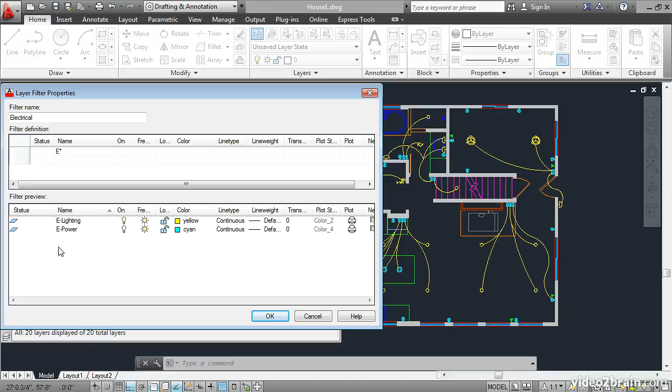Let's call this filter Electrical. Click in the name area here and type capital letter E. This filters the layer list to display only the layers belonging to the electrical discipline. Click OK, and the filter shows you the list. Click on All to see all of the layers again.

Let's create a different type of filter. Right here, you can create a new group filter. Click the button and then press Enter. We will just accept the default name Group Filter 1, and right now there's nothing in it. Click on All, and then let's drag specific layers into the Group Filter 1.

Drag in A doors, A poche. Poche refers to the shading inside the walls. And then scroll down and drag in the electrical layers and the D communication layer. Then click on the group filter. So it receives only the layers that you drag into it.

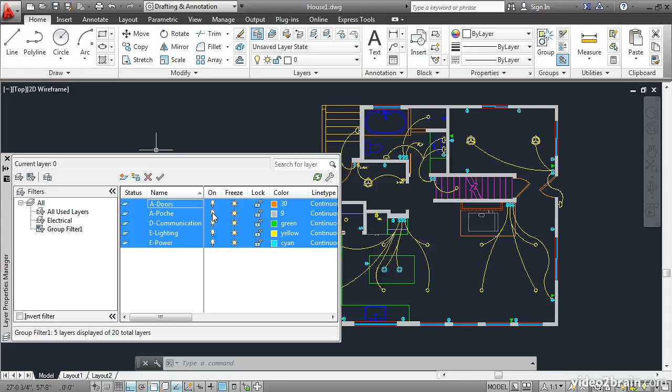I'll select all of these layers by clicking on the first one, holding down the Shift key, and clicking on the last one. Then I'll turn them off by clicking any one of the layer's light bulb icons. Click on All to display all of the layers. You can also sort the layer list by clicking on these headers. I'll click once and then again to sort the list in opposite order, and you can see all the layers that are off are now at the top of the list.

Every drawing has a layer 0. This is created by default. Drawings can also have another system layer called Defpoints, and this is generated when you add a dimension object. I'll scroll back up and notice that this one layer has a green checkbox next to it. That indicates the current layer, and you can only have one current layer at any given time. I'll double-click on A header right here to set it current. It also says that right up here, current layer A header.

I'll go ahead and draw a line over here in this door opening, and it will be on the A header layer. It's white right now because layer A header is white. I'll click on the color swatch to open the color picker, and I'll select a color. I'll choose a green up here. Colors have swatches, and they also have numbers here.

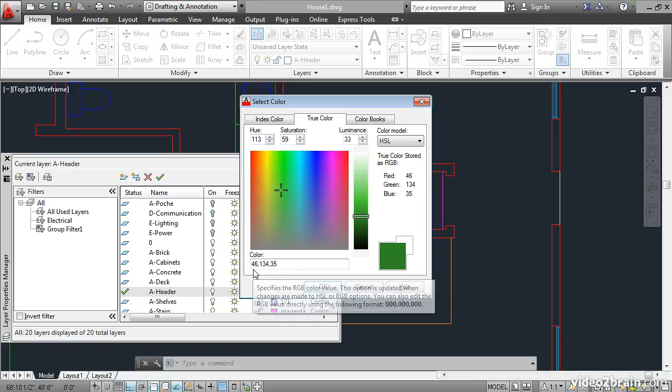This is color 94. In AutoCAD, color is used merely to differentiate objects on screen. It has a different role than in a program such as Photoshop, where you're representing continuous tone. However, you can select true color if you wish from this color ramp. You can drag the crosshair around to select a specific hue and saturation level, and you can also drag this slider to set the amount of luminance. If you do this, your color will have 3 numbers representing the red, green, and blue components.

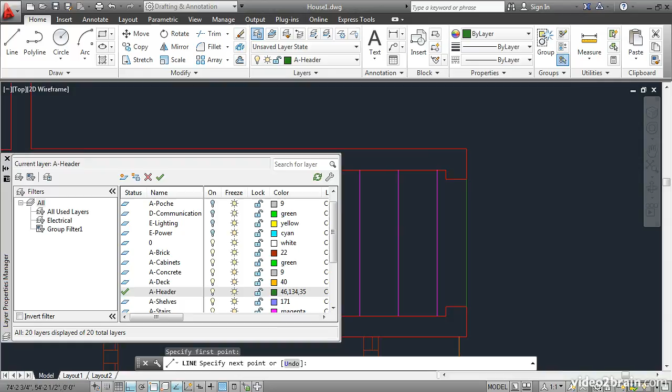I'll click OK. And you see here, I can expand this by dragging it, and you can see the color number listed here. This is a true color, and these other numbers that are just single numbers, those are AutoCAD Color Index colors. I'll just go ahead and draw in the other header lines with the Line tool. I'll press Enter, Enter to end and restart the line command each time I need it. And then over here we have some other headers that we need. Again, headers are the part of the wall above a door or opening.

Now watch what happens if I turn off this layer. I'll get a warning. It says the current layer will be turned off. What do you want to do? If we turn off the current layer, then we have a potentially dangerous situation, because I could draw another line here, but it would be invisible because it's on a layer that's off. So you should avoid this practice.

Instead, I'll turn that layer back on, set a different layer current. I'll double-click on layer 0, for example, and then I could toggle off A-Header. If I were to draw an object, such as a line, I would see it because it would be on layer 0. I'll just turn A-Header back on and then erase these stray lines.

Layers can also be frozen. If I freeze a layer, it likewise hides it on the screen. The main difference between turning a layer off and freezing it has to do with regeneration. I'll just zoom out a bit and demonstrate that for you. I'll make A-Header current, draw a line that extends up above the plan, some arbitrary distance. And then I'll zoom extents.

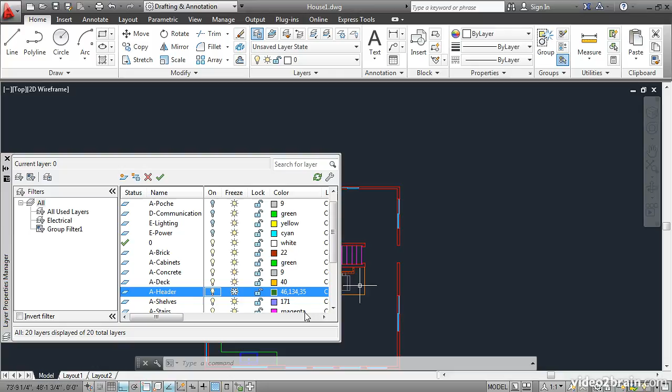However, if I freeze the layer and turn it on, it's still invisible. But then if I do a zoom extents, AutoCAD is no longer considering that object. So that's really the main difference between turning something off and freezing it. I'll go ahead and thaw the layer and then erase this line.

You can also lock and unlock layers using these padlock icons. If I lock A-Header, notice that the color dimmed slightly. If I put the cursor over A-Header, you'll see an icon appear that's a little padlock. This means it's locked and I can't do anything to it. If I try to erase it, say, and click on it, it will just say one was on a locked layer and it won't let me select.

This isn't really a security feature because I can come back here and unlock the layer and then I could erase it if I wanted to. Locking isn't really a security feature, it's more of a convenience to keep you from inadvertently deleting things that you want to protect. Layers have other properties that you can access by scrolling over.

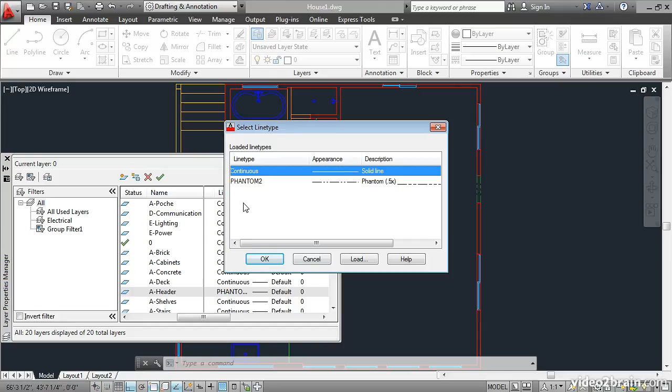Here we have line type. I'll click on the word continuous here on the A-Header layer and change the line type to Phantom 2. The style of the lines changes. Now this line doesn't actually have any breaks in it. It's still a single line object, but its representation uses the Phantom line type. I'll just change that back to continuous. You can also set the line weight, which refers to the thickness of the line here.

Layers can have a value of transparency from 0 to 90%. The plot style in this drawing is set to a color-dependent plot style, so the color number here is not editable. It merely represents whichever color I have selected over here. This is a true color, so it's giving me a color 97 for some reason here in the plot style.

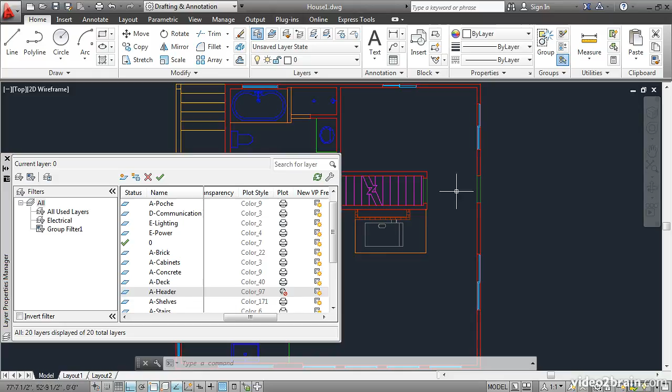This is a plot toggle, so if you click here, you can make it so that this layer will not plot. This can actually drive you crazy if you're wondering why your plot doesn't have the headers on it. It might be that this flag is selected here in the Layer Properties Manager. I'll click it again to enable plotting for this particular layer.

There's also a New VP Freeze icon, and this refers to freezing the layer in a viewport, which is in a layout. So to summarize, you have become acquainted with the Layer Properties Manager, have created a new layer, assigned it specific properties, created layer filters, and drawn on the current layer.